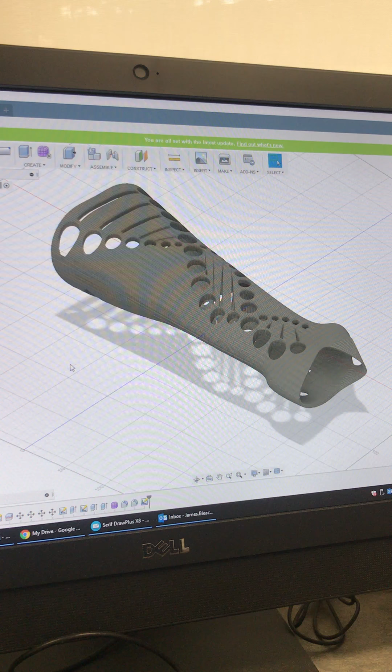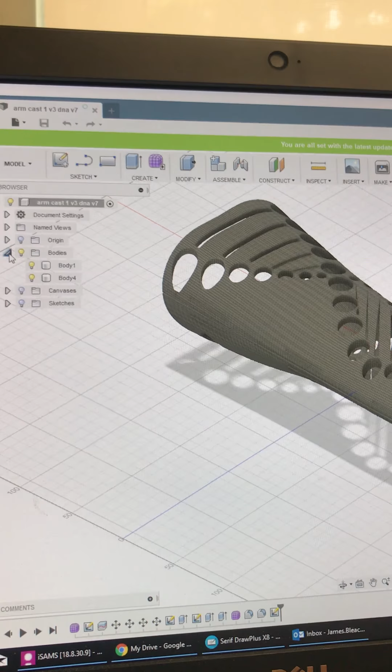So in this video I'll talk you through how to take your 3D CAD model ready to 3D print. So we'll go directly from Fusion into the 3D printer software, and in this case for the FlashForge it's FlashPrint. So we open up our design. We might want to take note whether the design is made out of one or more than one body. So this one has got two bodies, so I'm going to just take one of them through to print.

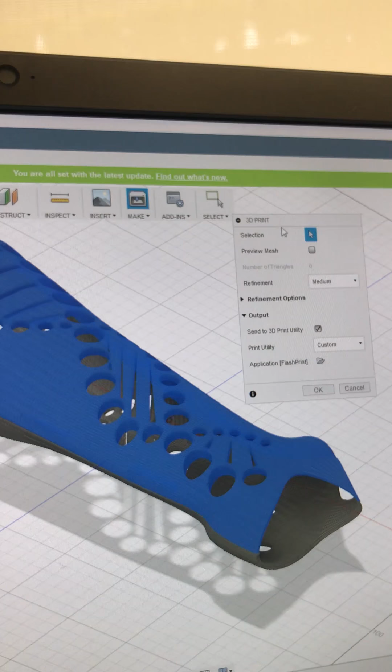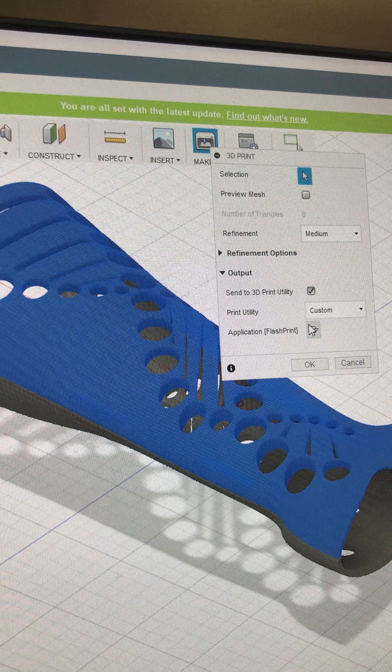So I could right click and save as an STL, and I could go over across the ribbon to make and 3D print. And when we do that, a grey box will appear and it will ask us to choose our selection, which we have. You can preview the mesh, you can change the refinement of the output, and then you can send it straight to a 3D printer utility, which is your software, and you can choose if you've already got it loaded up onto your computer, so you can see FlashPrint here. So I'll click on OK.

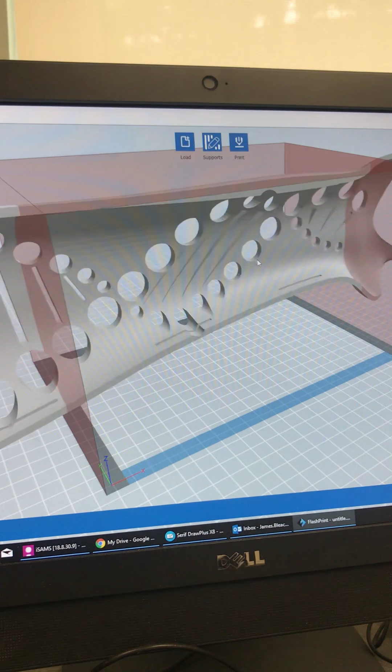Now this design will be too big for the FlashPrint print area, so I'm just going to avoid the update for now, and I'm going to put it on the platform. So at the moment, if I maximise this, you can see that the print is too big for the platform, so I'm going to have to slice it up. So the way that I will do that, I'll take my design, so you must select it, and I'm going to rotate it, and on the y-axis -90. So it's now going through the sort of roof of the area and through the bed. So I'm going to go back to move and put it on the platform.

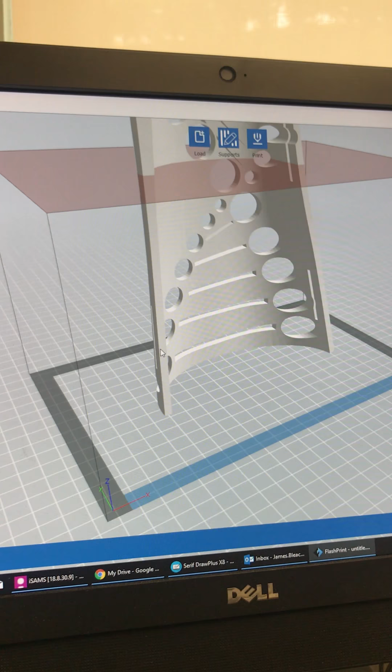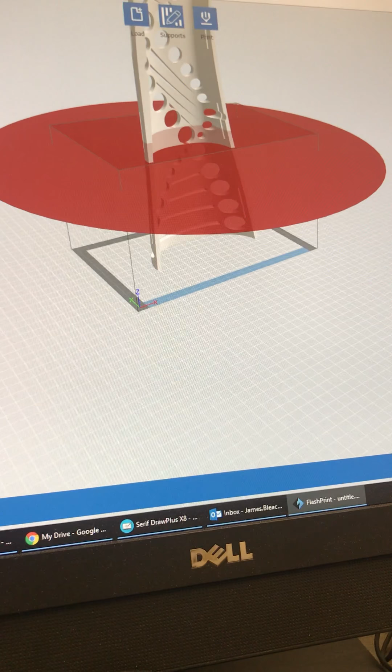And this is where I will use the cutting tool. So I'll go to cut, and you can draw a line with the mouse, but it's more accurate if you choose your plane, and then you'll see the red disc to see the height it's cut at. Now I usually set a height myself, so I'm going to go for 120 mm, which brings it just inside the print area. Now if you click on Start Cut, it slices the model up, and this time I'll do 240, and I'll go on to Start Cut again.

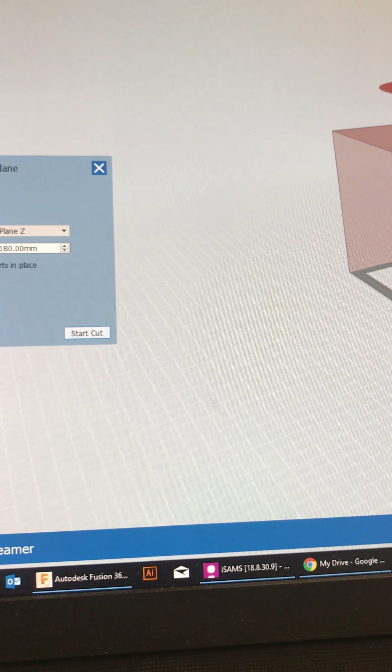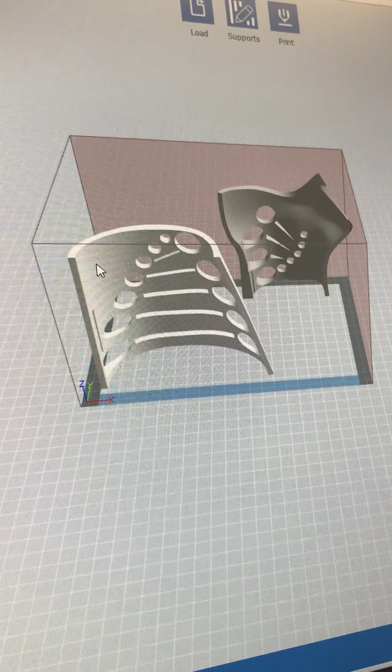So it's broken it into 3 parts, so I can now choose the model to move, and I'm going to put it back onto the platform. So I'm going to do that twice. I'll choose a model at the top as well on the platform, and then you can make the choice as to whether you're going to 3D print all of them or if you're just going to 3D print part of it. So here I'm going to take out the middle piece, and I'm going to take out the end piece, and I'm going to move the main hand piece into the middle.

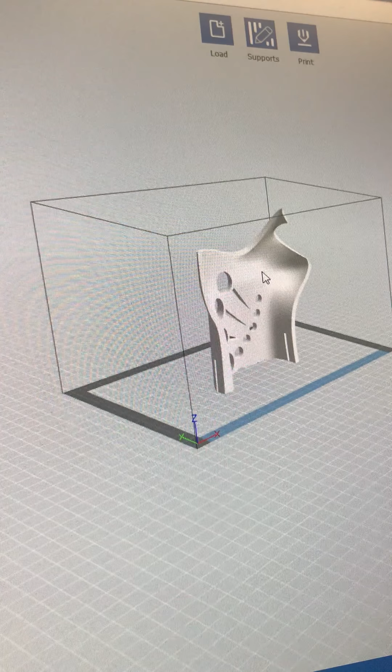Now at the moment we haven't got too many sort of overhangs. There are the circles here which will require a tree-like support system, so I need to choose which extruder I'm going to go for. So I'm going to go for the right hand side extruder, as I have a choice of 2. So I'm going to select my model and go onto extruder and use the right hand side.

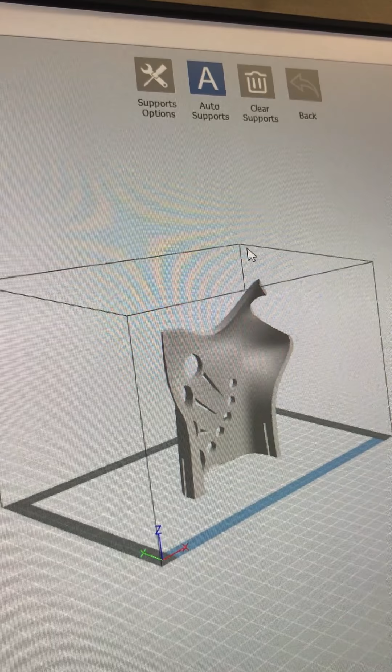Then I'm going to go onto supports up at the top, and support options, I can do tree-like or linear, and I can play around with the settings. I can go onto auto supports, and you will see that it creates a sort of branch-like structure. I quite like these ones because they're easy to break off afterwards. So from here we come back out. It'll give you the option to save it with the supports, but I'm not going to on this occasion.

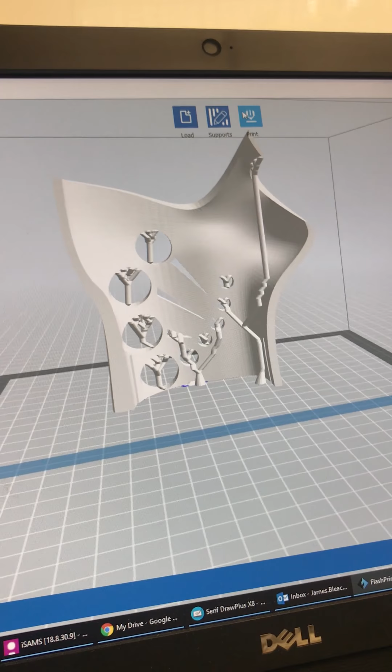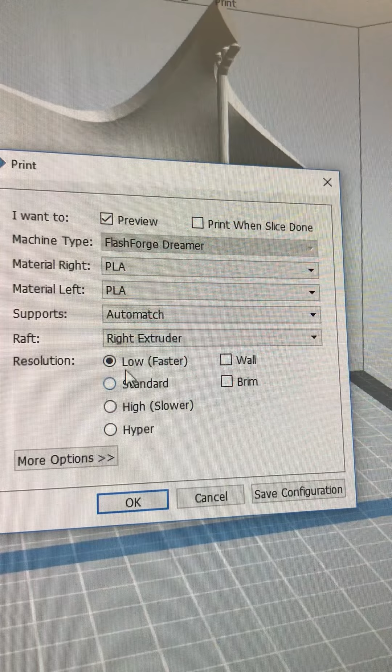And I will go to print, which is up at the top, and it will ask me what type of machine, what type of material on each extruder, and supports, and raft. I'm going to keep the raft on actually, just because of how tall and thin the item is. I don't want it to fall over. Low resolution will obviously be quicker, probably slightly thicker layer height, and the quality won't be as good, but when you're doing a first model test, then it doesn't matter too much. You can go into more options and play around with the shells and the infill and the speed, etc. But I'm going by the factory settings at this point. So I'm going to go to OK.

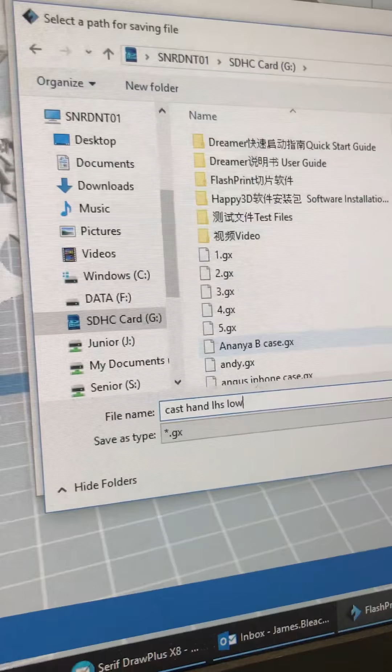It will prompt me where do I want to save the item, and we have an SD card for this printer, and I'm going to call it cast hand LHS for left hand side. It's quite good practice to put what quality settings you're saving that print on as well. So if I save that as low for low quality and click on save, it will calculate the design or the print,

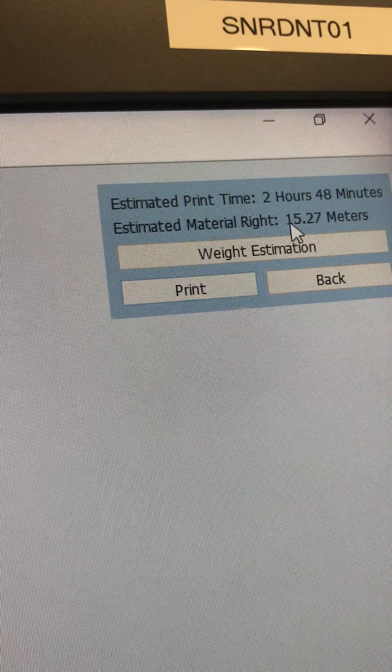and that will come through at 2 hours and 48 minutes and 15.27 meters. And you can have a look at weight estimations as well, which will tell you here, and you can also have a look at dragging the 447 layers down to have a look at how the print will progress.

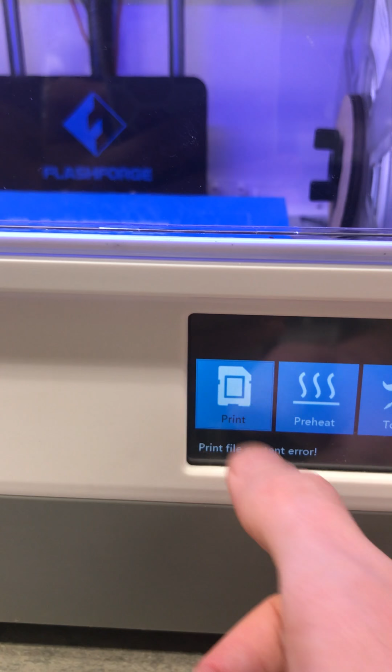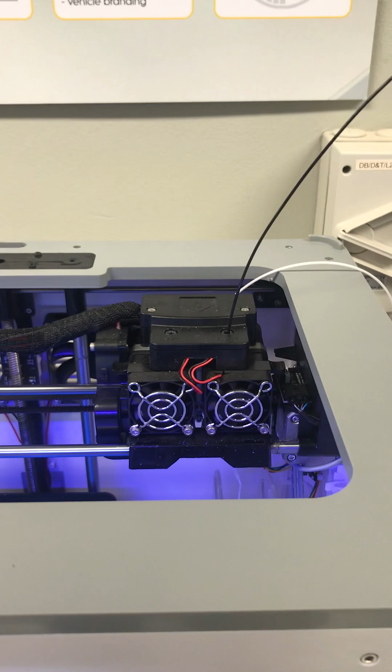So I can click on back from here, take out the memory card and take it over to the printer and slot it in at the side, and then on the printer's panel, click on print, click on the memory card, and then I can go down and I can choose cast hand LHS low. I could have put more instructions on there. If I hadn't put LHS for left hand side of the hand, then I might have put RHS for the right hand nozzle. So this printer filament is set up on the top, so I'm going to click on print, so it will now start to heat up. It will move the bed and it will start printing layer 1 onwards.